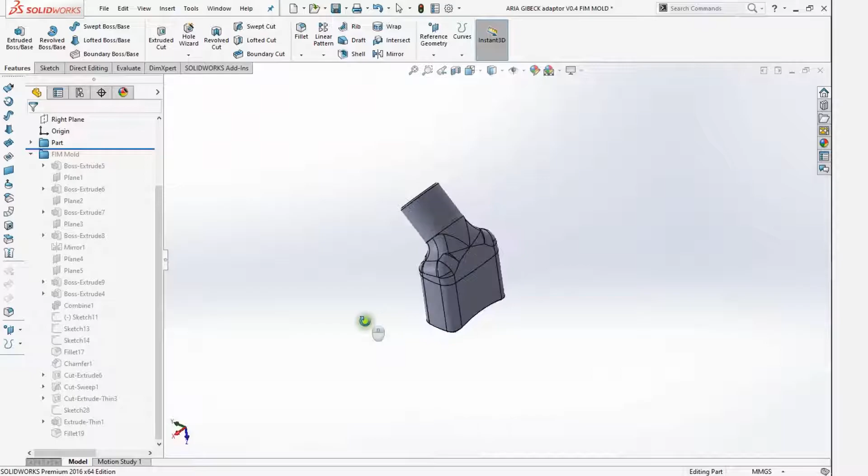The first design I will show you is a FIM mold, which is what we would normally do. After this I'll show you how to do it in a split mold instead, which is what we ended up with.

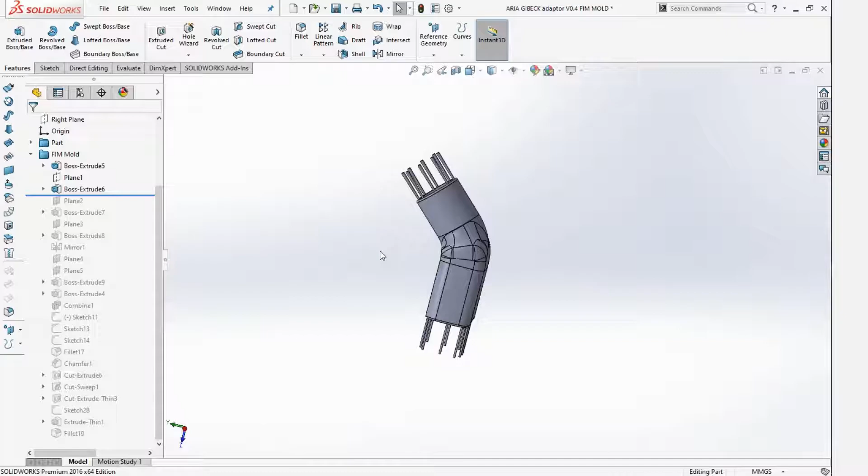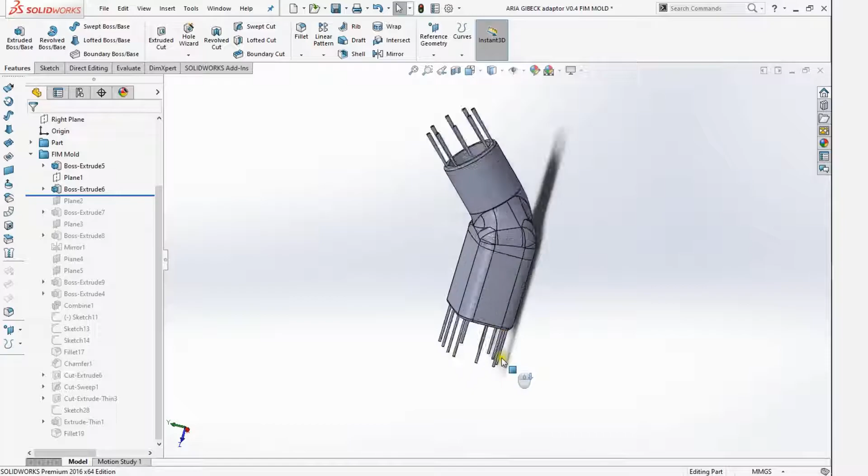Let's begin. First thing I'm doing is putting a lot of vents here. This was a case of urgency, so I wanted it to mold right the first time, so I put way too many vents on it. That's a good thing to do when you want it to work the first time - you can reduce it later. Also, these surfaces are really easy to trim, so you could put as many vents on as you want and you won't notice it afterwards.

Some more vents here and a couple of vents on the side. Now I'll just start the gating here, as you see.

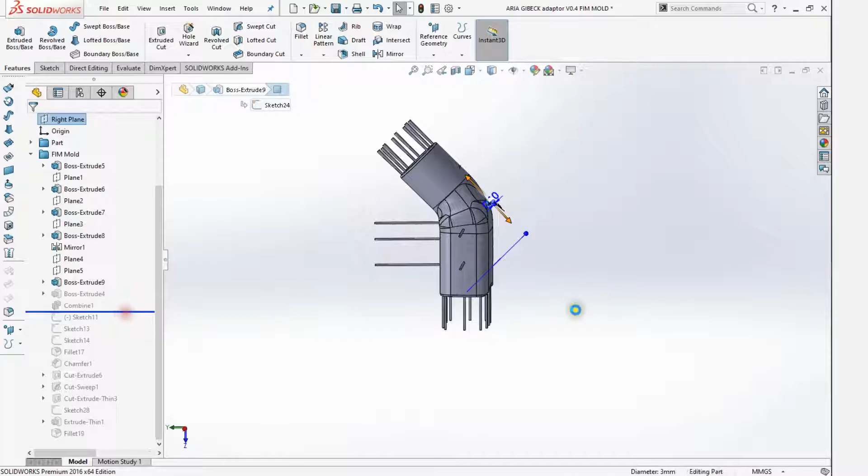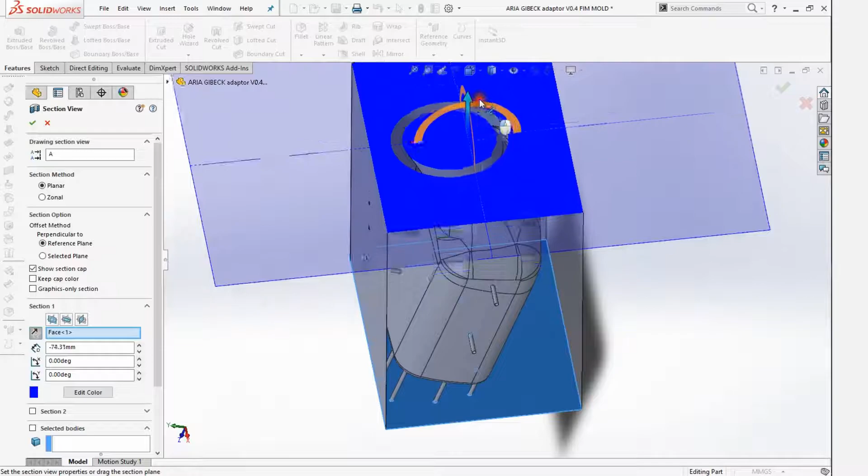There's of course the part of checking the printability, which we can do here. I put a mold around it. This mold I know fits one of the frames that we have, that's why I chose it, and also why we ended up with the direction of printing - because as you see here, this part is actually printable in almost any direction.

So this was just a matter of making it fit the frame that we have. What I'm checking for when I do this is parts that pop up somewhere all of a sudden, because that of course won't do. But this part is made for additive manufacturing, so it works perfectly.

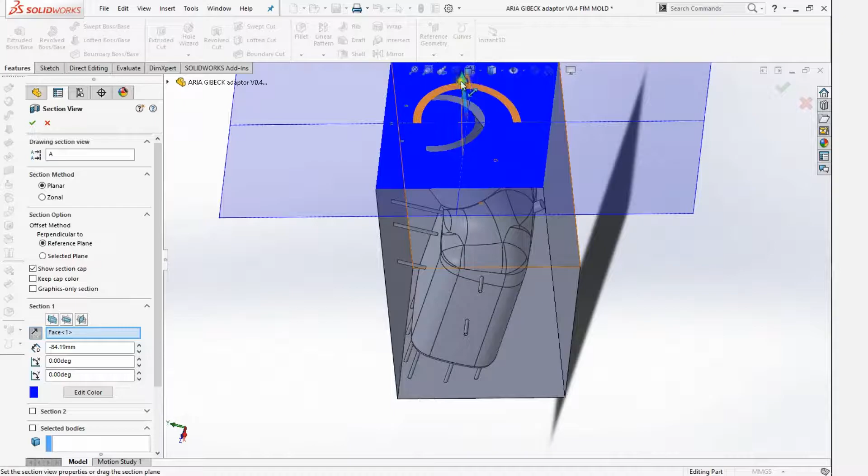Okay, let's get on. So I've added some fillets here because our frame has it - it's a nice detail as well - and also some chamfer here to compensate for the burn-in layers.

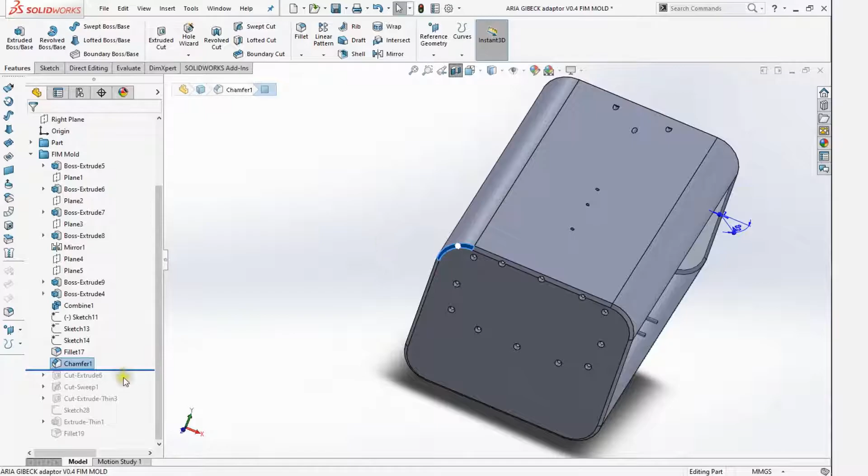I've begun the end of the gating because I want to shoot in from here. So now I know I have a starting point and I have my end point down there. Okay, now I just need to attach the two of them.

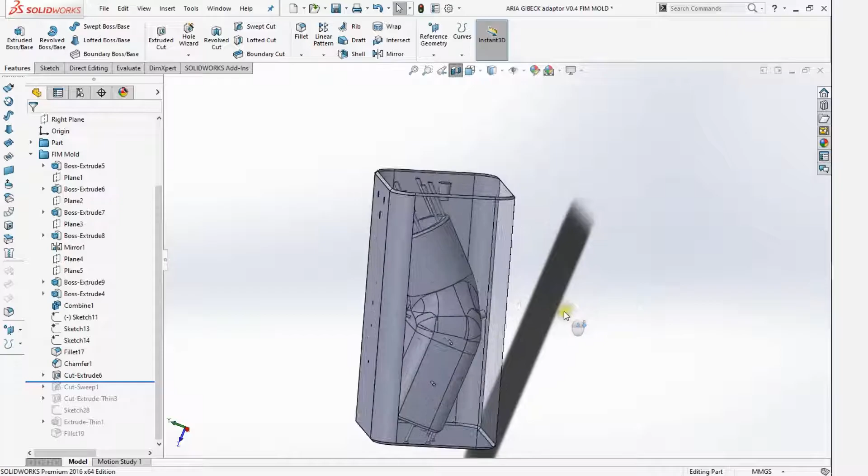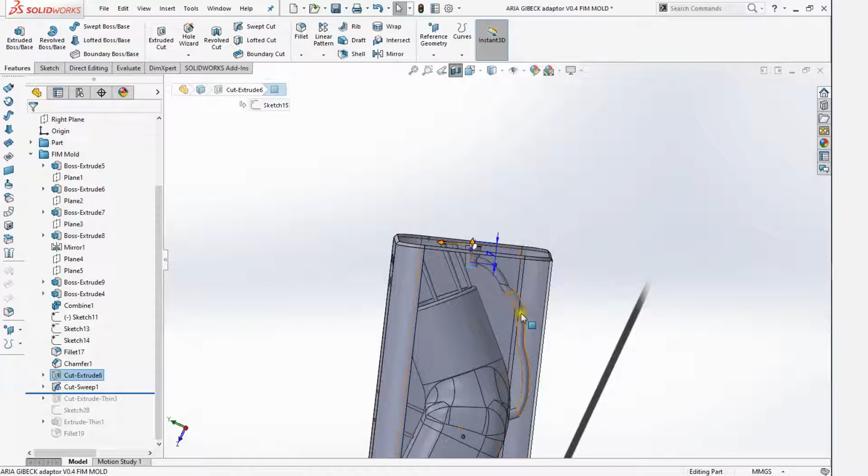Let's just make this transparent. So the way I did it, now I have some recess for bad material that comes down here, and hopefully the good material will run down and inject it. It doesn't look too pretty, but again, it had to be done quickly and it works.

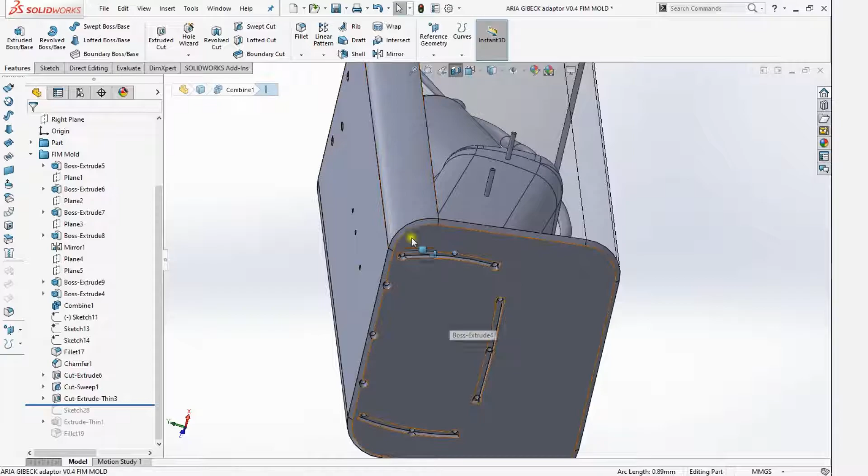The next thing is that since this is the direction of printing, I want to make sure that these vents down here don't clog up when we use burn-in layers, the first initial layers that we do for printing. So we made some tracks here to allow the resin to move out, and also it works as a place for air to get out when we inject it.

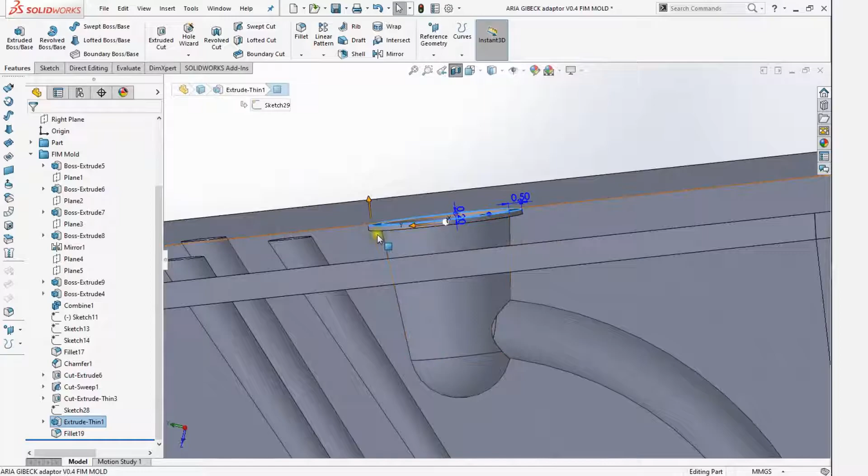So the last thing I did was just a small ring up here. It's basically 0.2 of a millimeter high, but it's just to make sure that we close really tight when we injection mold it. And that's basically it.

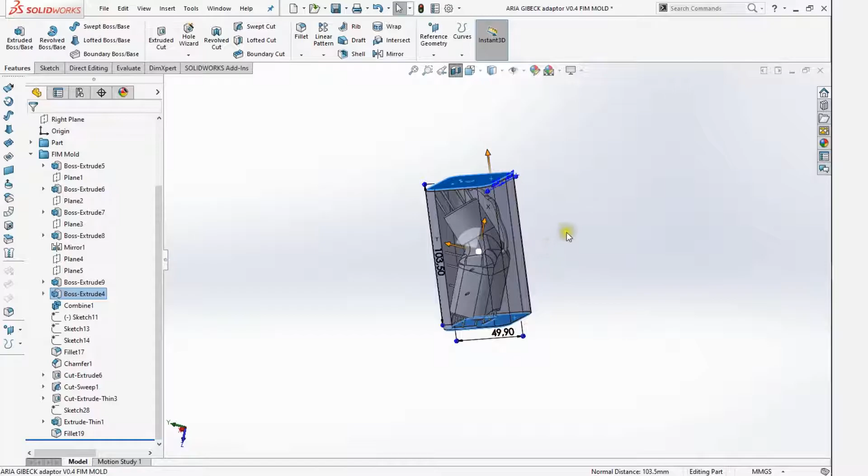This is a really simple mold, but as you can see here, it is also 100 millimeters high around it. So it's both a long print to do, so it gets kind of expensive, and we knew that we had to make a lot of these in a short time.

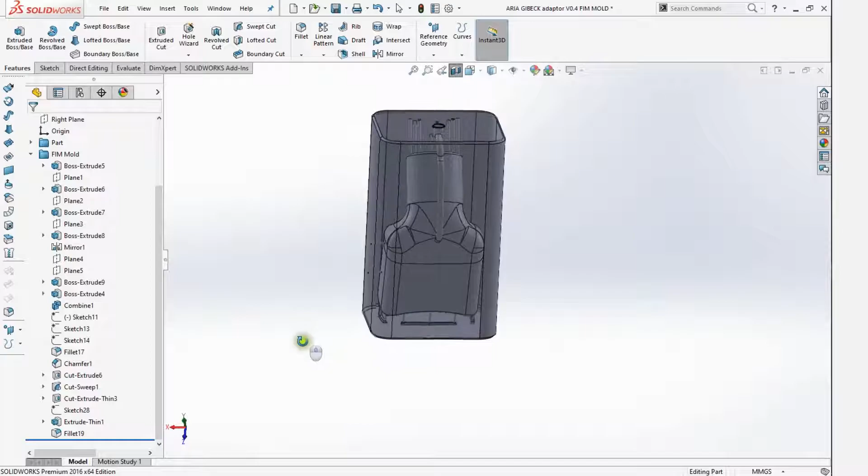So we actually had to come up with a method to reuse these molds. Normally you sacrifice a mold with the FIM process, but you can also do it in a way that you can actually reuse these. So I'll show you how to do that.

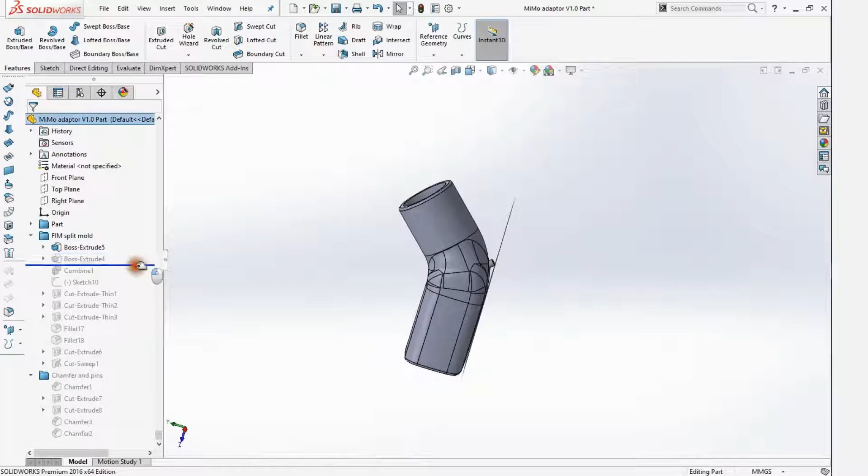Again, this is the part that you saw before, exactly the same. So the gating is exactly the same place. We put a mold around it, just like before. Let's see what happens here.

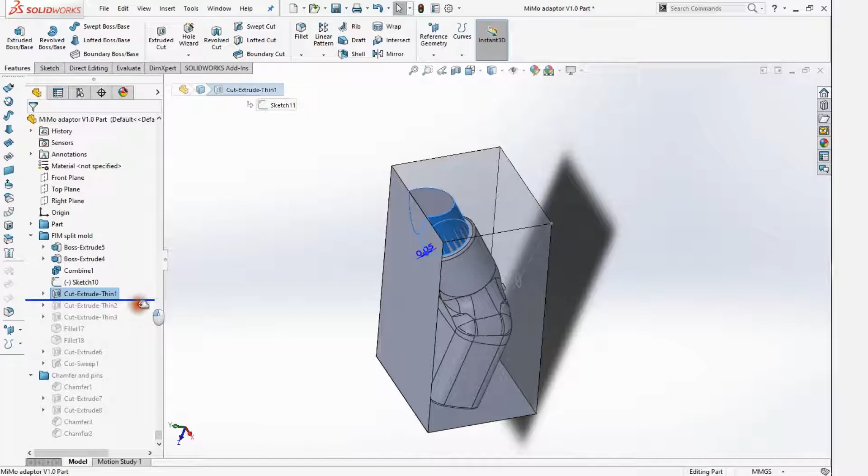So what I did here was begin to do what would be a split mold, because we want the inside of this part as a single body, and then we want to split this part up here in two, so we can actually put them together. It's gonna be real cool, just hang on.

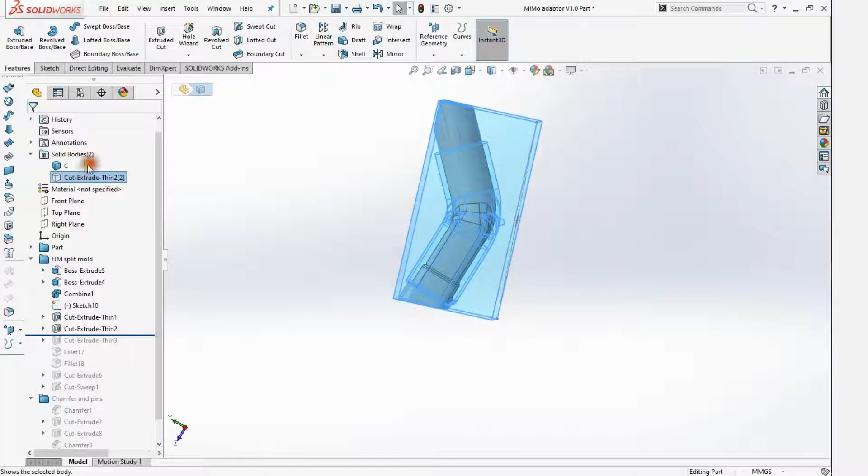So the same goes down here, and now we actually have two bodies. So we have the inner core, and we have the outer core, as you see here. So what we're doing is actually printing all the mass between these two.

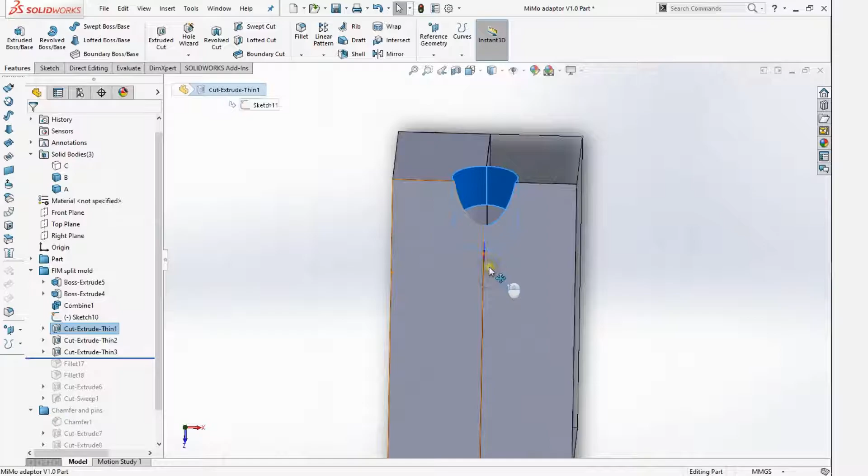And now we just split these. You can do it by cut extruding a very thin line, or just using a split line. In this case we used a split line. So now we have three bodies.

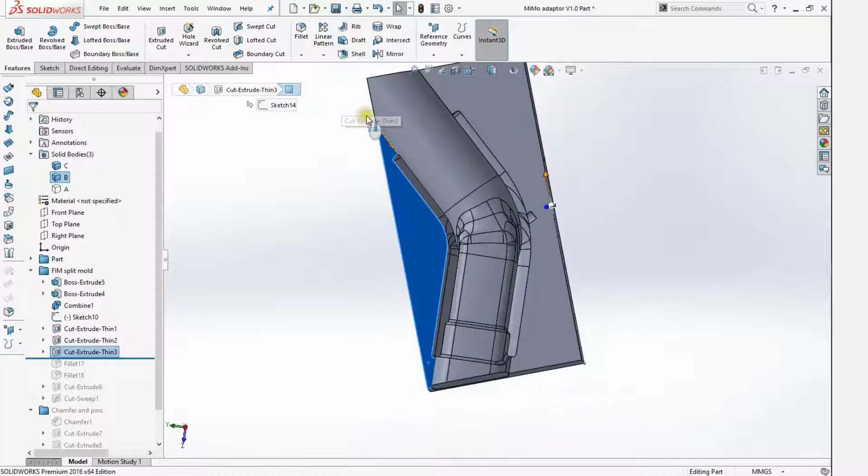And if you want to see it with this part here, down here it's really tight fit, but there's room for a bit of air here, which works as the vent itself, so we don't have to put a lot of small holes everywhere. And the same goes down here.

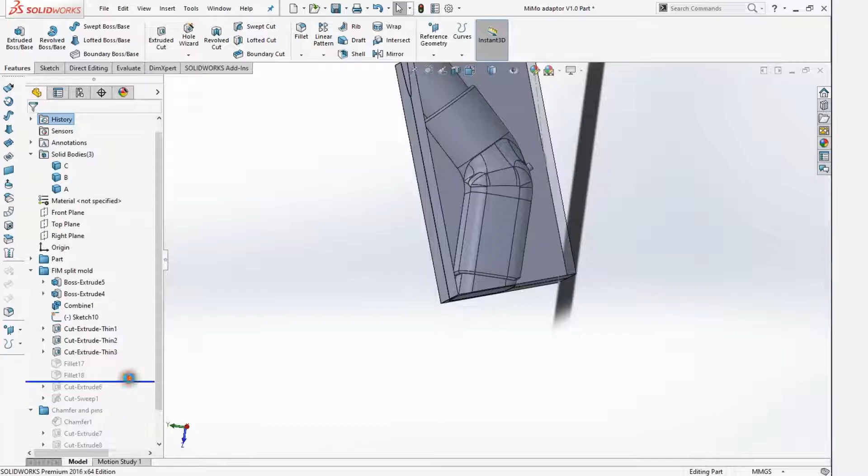Okay, now we'll add some details here. It's the same frame and also the same gating as we used before, because we know it worked. So now we basically have a split mold. I will show you once again.

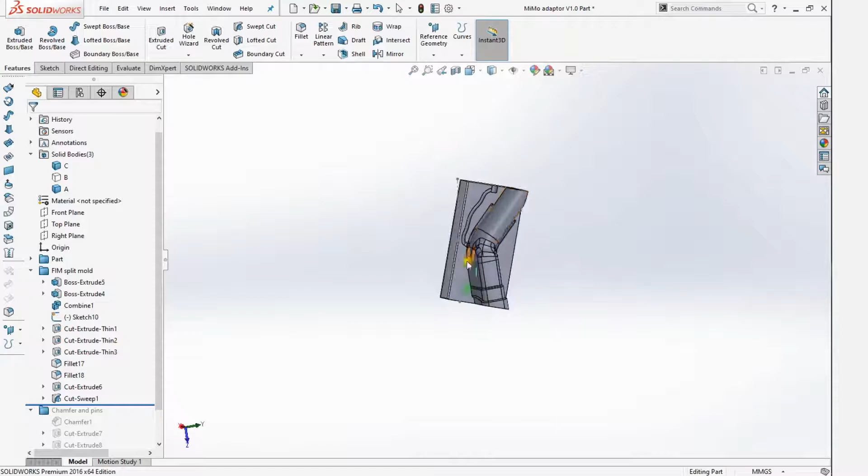So it runs down here, everything off, and now you can split these off, and then what we did was just pull the TPE part off.

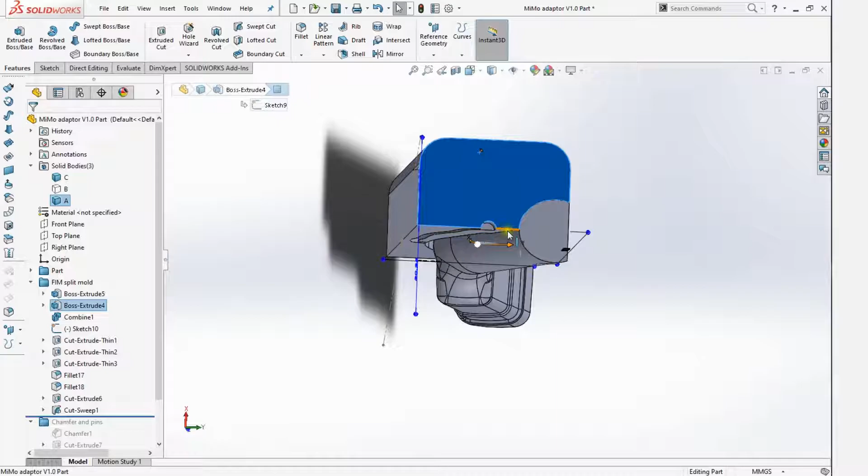It worked really well. But now the problem with split molds is that the injection pressure, and especially when you have the gating in a parting line, these parts will most certainly move away from each other, just a bit at least, as much as there's room for.

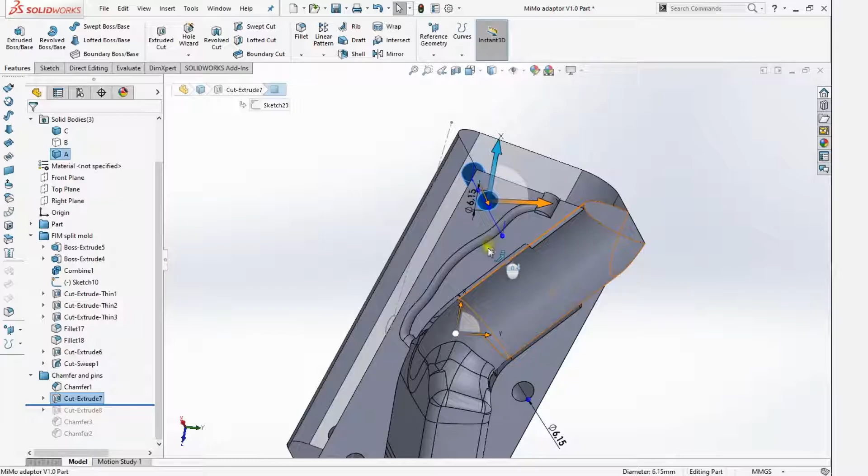So what we can do is make sure that these parts don't move all around. So what we did here was that we made some cut extrudes here, some holes for pins, steel pins. So the steel pins actually only work as steering, as guiding pins, so we're sure that these parts don't move away from each other.

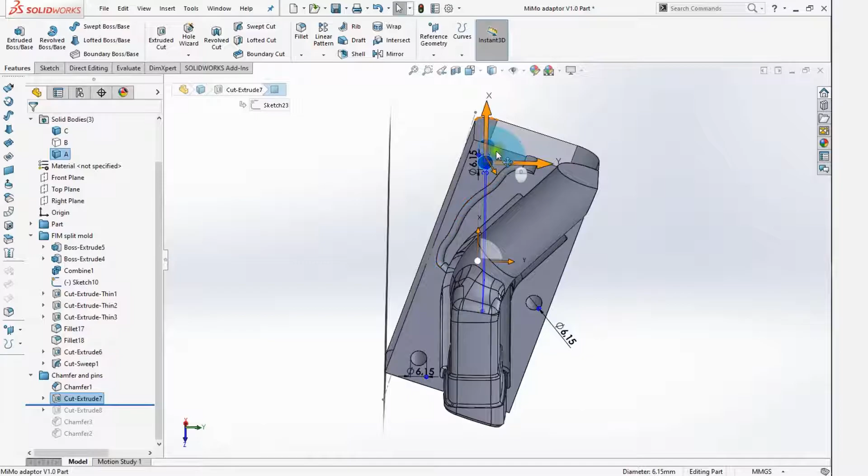So what you could also do was actually making holes through the part and using some screws and nuts. I would do that normally, but again, this was a part that we had to be able to do one in 30 or 60 seconds, and if you had to unscrew it each time, you would have to spend a lot of time doing that, and also perhaps another human, and it would require some extra staff to do that.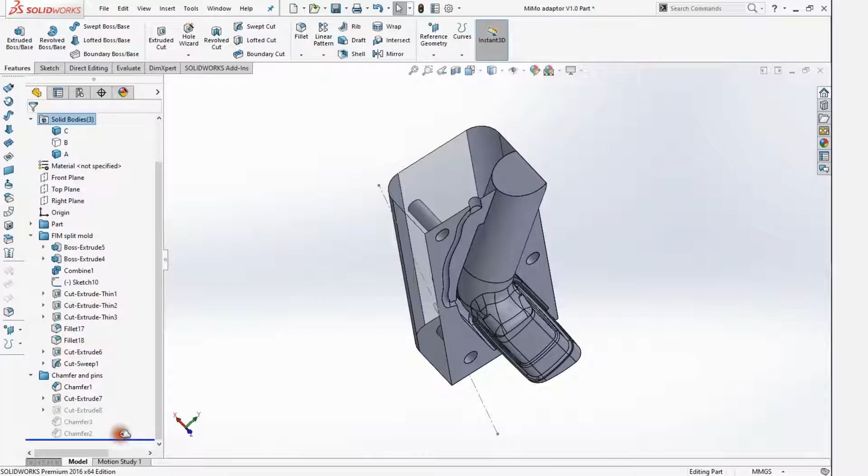So we gave it a shot with the pins and it worked. Last thing was a long pin through this part here to make sure that it didn't wobble or move up and down. And that's basically all there was to this part.

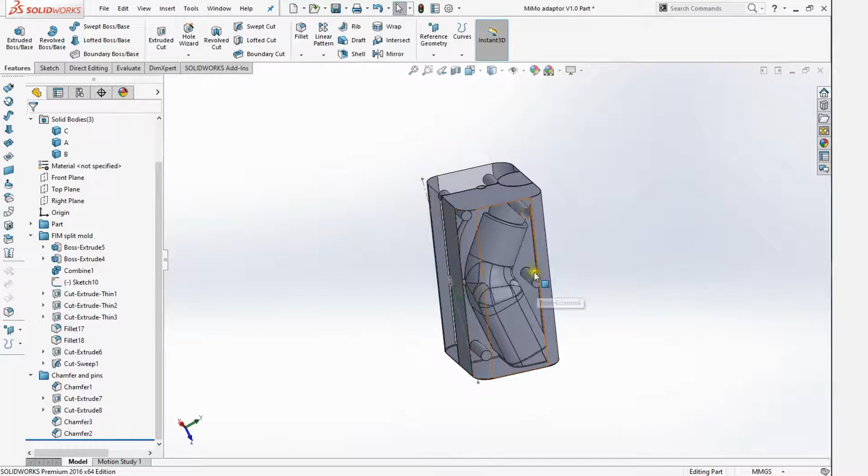It was a really cool part, and after this we ended up making it as a seal tool, and perhaps I'll come back to this in another video later on. But for now, this was a quick guide on what we did here. Thanks.